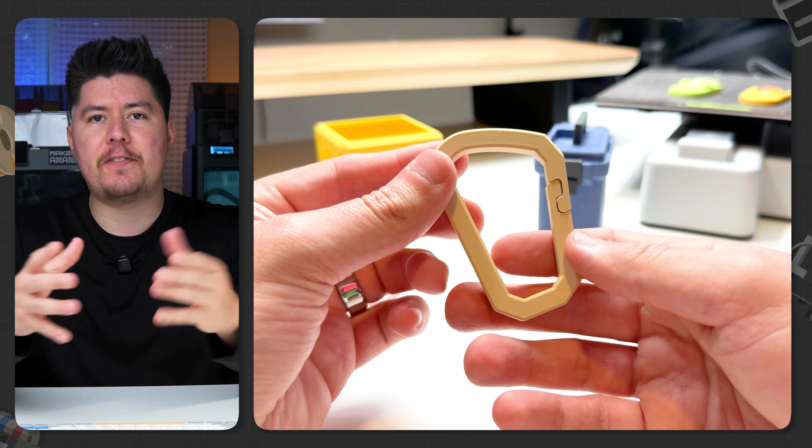Welcome to day 5 of learning how to design your own models for 3D printing, and in today's video, we're going to learn how to make this 3D printable carabiner from start to finish. This is a fun, functional design that anyone can design from scratch. It's perfect for beginners and it's a functional design.

Now, I do want to mention, since this is 3D printed and simply made from plastic, I would not recommend using this for outdoor use or for hiking. This is simply for educational purposes as well as for your own personal use. So with that said, let's go ahead and jump right into my computer and get started.

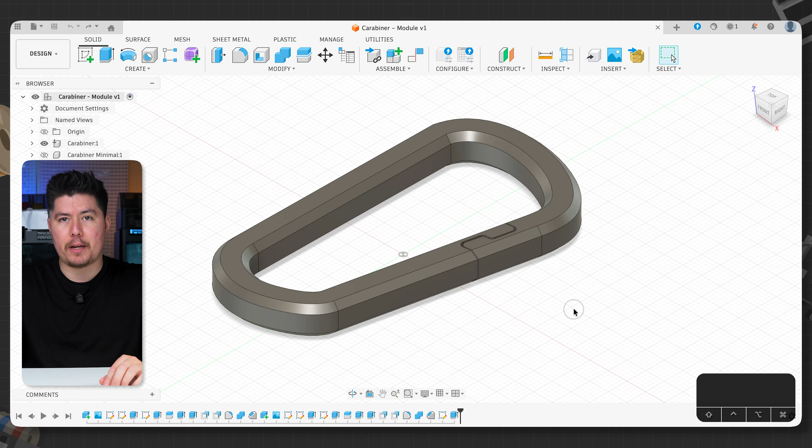So to start, the first thing we want to do here is open up a blank new canvas within Fusion. So I'll go ahead and create a new design within Fusion, select Part Design, then select Create New. Now, the first thing we need to do here is to create the overall sketch of our carabiner. Now, one thing to know is that this design isn't rectangular, nor is it circular like the previous designs we worked on. So we're actually going to import an image and then sketch out according to what that image looks like to create an accurate sketch of what our design is going to look like.

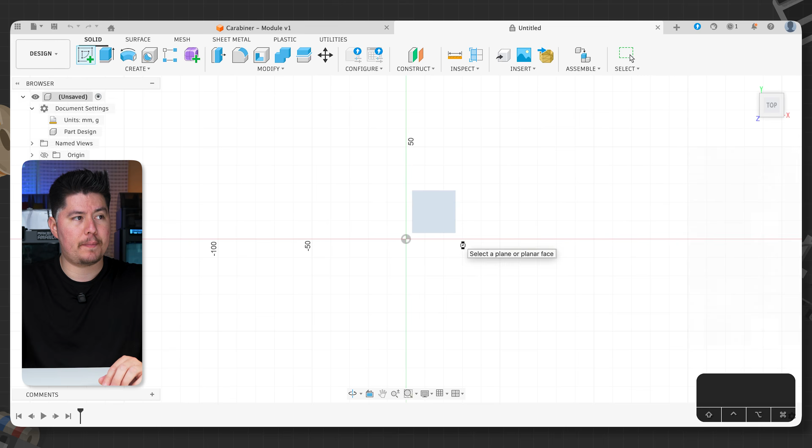So what I'm going to do here is create a rectangle. So the first thing I want to do here is click on Create Sketch, then select the bottom plane here. Clicking on Create, Rectangle, I'm gonna go ahead and select Center Rectangle. Now, from the origin, I'm gonna go ahead and draw out a rectangle. This is gonna be used as my reference to estimate the sizing for my image within my canvas.

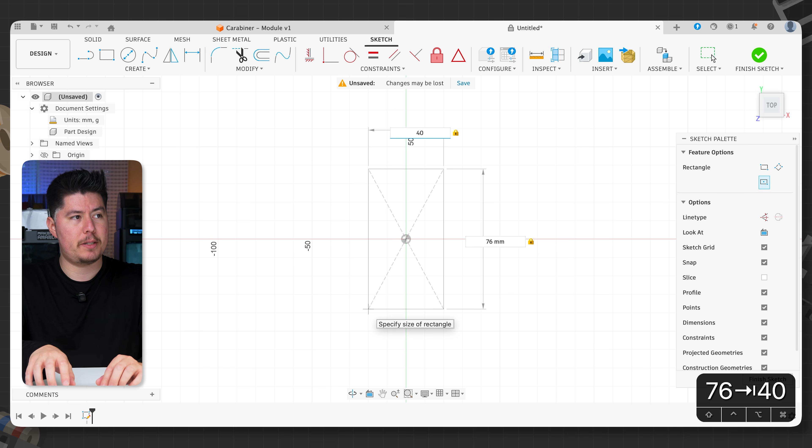So the way I'm gonna set this up is gonna be 76 millimeters for the height, and then the width is gonna be 40 millimeters. Once done, I'll press Enter. And now you should have something that looks like this. Now, we won't be using this in our design. We're just simply gonna be using this as a reference.

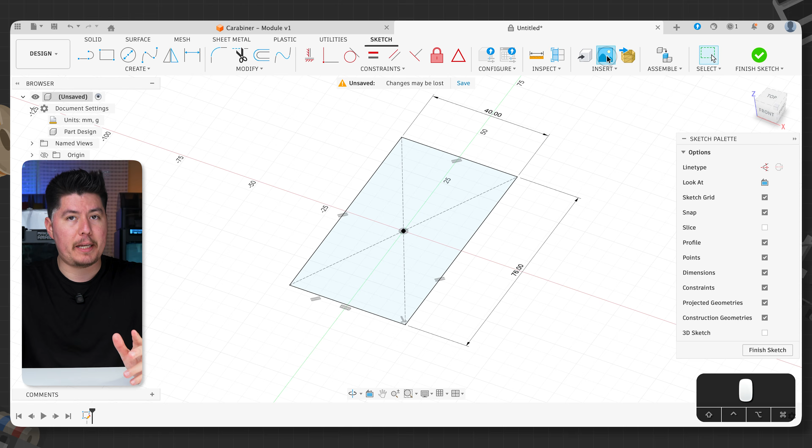So to start, let's go ahead and select the image icon here on the top right-hand side, selecting Canvas, then Insert from my computer. And then I'll go ahead and attach the image into my canvas here. Once done, Fusion 360 will prompt us with a dialog box as to where we want to place this. I'm gonna go ahead and select this profile here, and then it's gonna attach the image right in the center of our sketch.

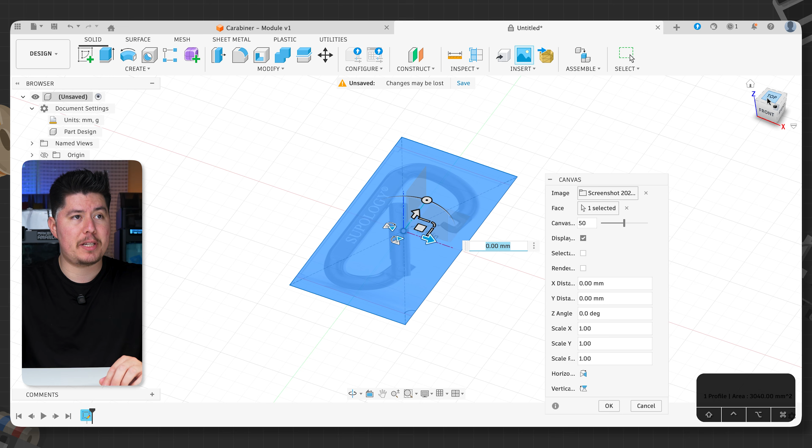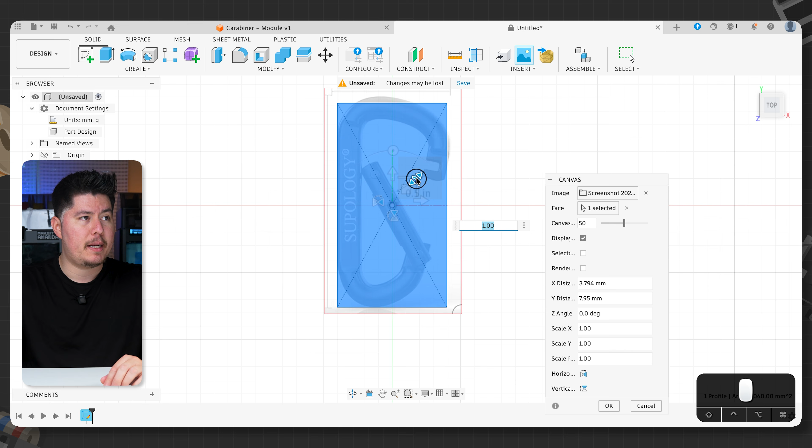From here, what I wanna do is to ensure that the overall image, or more specifically the carabiner in this image, lines up with the dimensions of this rectangle here. So I'm gonna use this square icon to pivot this, closest to the center at the bottom left-hand side, and then scale this up till all the ends around the carabiner touch the ends of this rectangle. So it doesn't have to be perfect. This is more so eyeballing it.

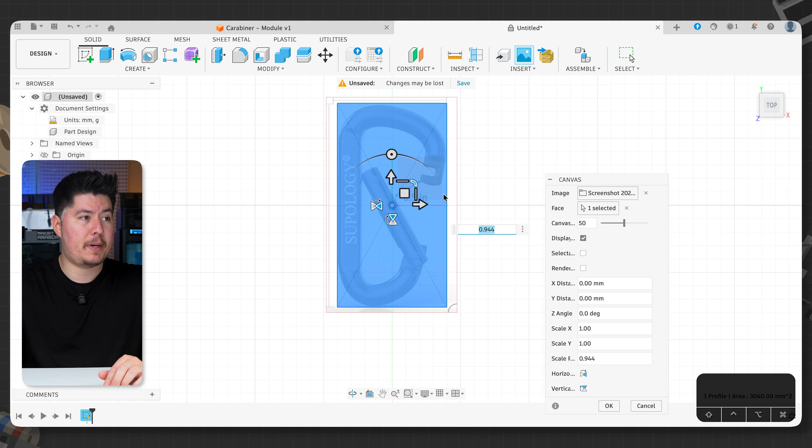And I'll make this a little bit smaller. Try to get as close as you can. Doesn't have to be perfect. Once done, I think this looks good for me. I have the outer edge here touching the rectangle, the top close to the very top, then the right, then the bottom. Once done, I'll press OK. And now we can go ahead and toggle off our original sketch by hovering over to the left-hand side, toggling on the folder icon, and turning off sketch 1, as we'll no longer need it.

Now we have a carabiner properly set to a sizing that will work for us within Fusion, which we'll export into our slicer, so we have a proper size for our carabiner. Keep in mind there are other ways to set the dimensions for this, but for now, simply as an exercise, we're just gonna import this into Fusion and then get started sketching from there.

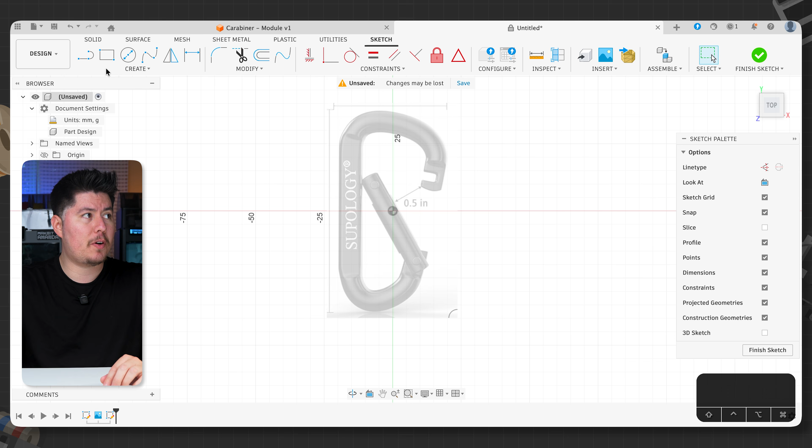To start, let's click on Create Sketch, then select the top plane here. Now what I wanna do here is to draw this out to the best of my ability. So I'm gonna use the line command within Fusion 360. I'm gonna hover over to the left-hand side, clicking on line, or pressing L on my keyboard.

Now I'm gonna go ahead and zoom in, selecting at this very edge of our carabiner, clicking our mouse, and let's go ahead and drag this up right till it reaches the very top. Once done, I'll select the checkbox here. And now as you can see, we can go in here and start mapping out a sketch for this product.

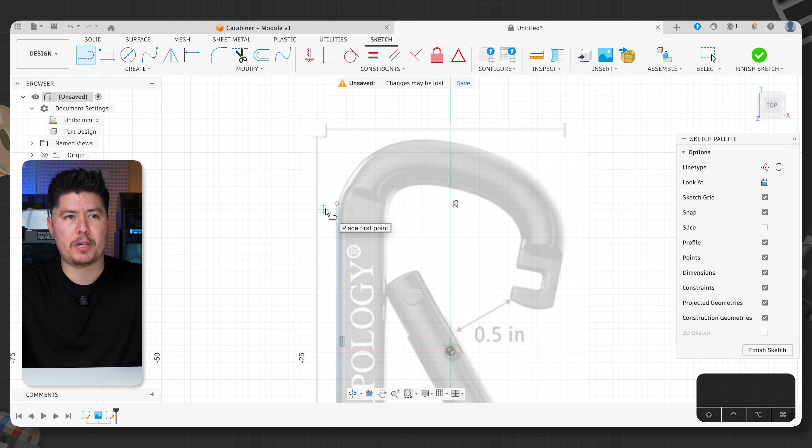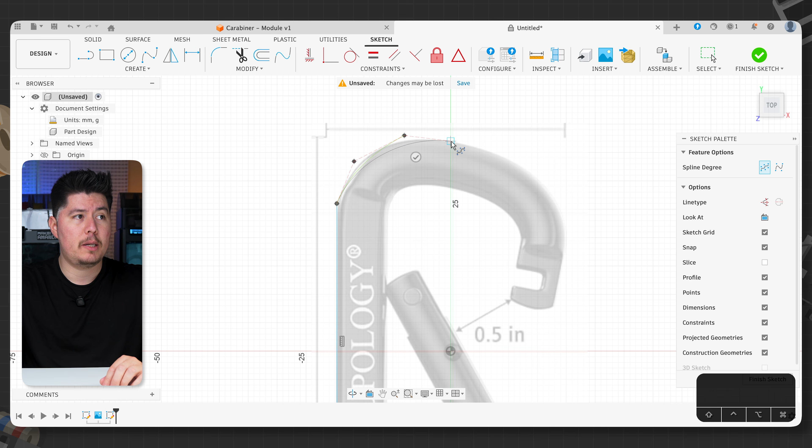But we can't use the line command for this because the line doesn't really give us an accurate representation of this kind of rounding corner here. Now, one feature we're gonna use is the spline point tool within Fusion. To find that tool, we're gonna press S on our keyboard, type in spline, and what we wanna use is control point spline. Now, selecting the last previously selected dot, we can go ahead and draw out a couple of more dots, rounding out the top and creating this sort of nice rounded top edge. And once done, I'll click the checkbox, press escape.

And since we're currently sketching, what we can actually do is to pivot these points right here in our sketch. And the cool thing about this feature is that we can actually pivot this and kind of move this around without actually affecting our design or the sketch too much. And I'm gonna go ahead and map this out as close as I can, getting a good look of our design and trying to map this as close as I can. And don't worry if it's not perfect. This is simply just for rounding out this corner.

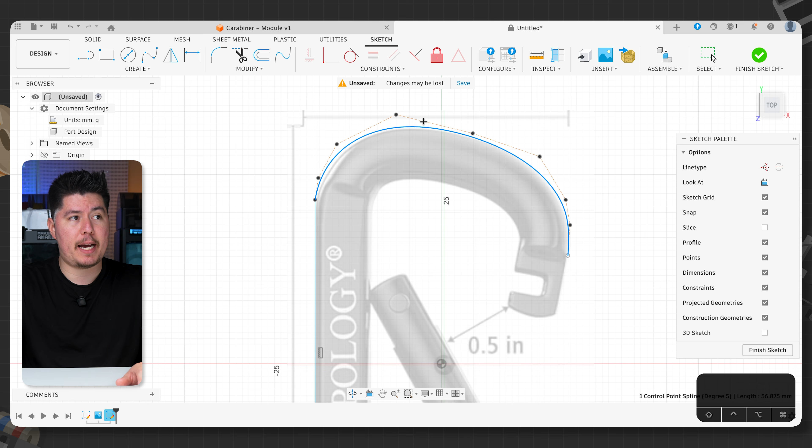And if by any chance you need to add another dot to this design, you can right click your line and you can insert control point, which allows you to select the line, add another dot, and that's going to increase the amount of splines that you just added, allowing you to further make this a bit more accurate to your image here.

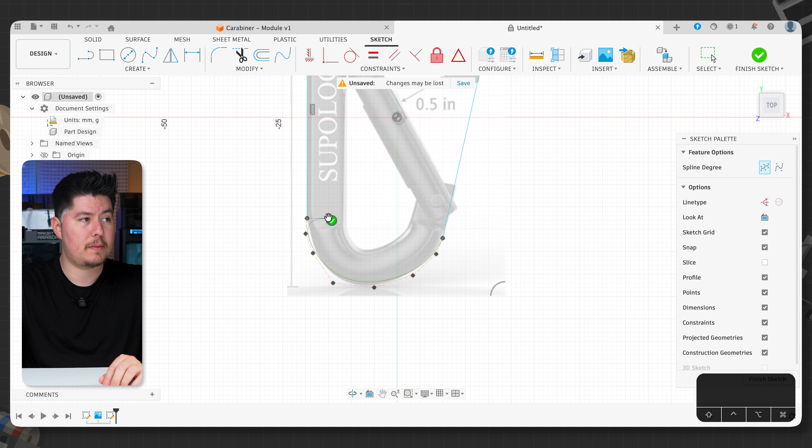Once done, let's go ahead and finish our sketch, pressing L on our keyboard, selecting this line here, or this dot, going all the way down. Then, right as it reaches the curve, checking this off, repeating once again, pressing S, control point spline. Then let's go ahead and finish this off by closing this out, and then just drawing it out and matching it up with our sketch or our image here on our canvas. Let's go ahead and clean this up. So dragging our points, making sure this lines up with our image. And I would say that looks good to me.

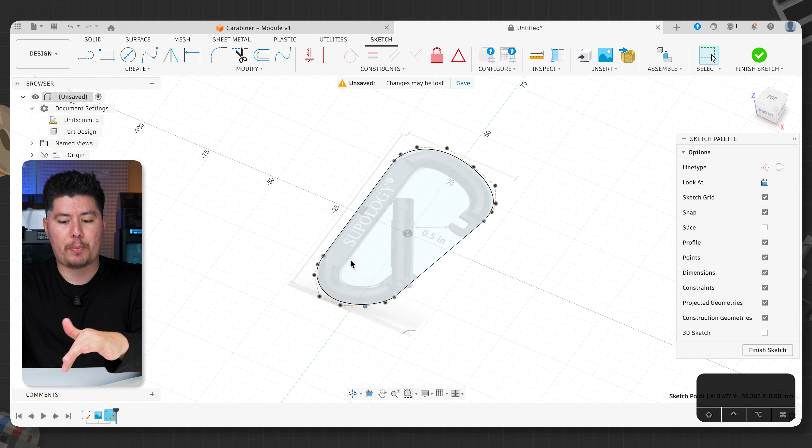Now, with all that completed, we pretty much have the overall layout for our design here. Now, one thing we can do is that we can go ahead and offset this in order to prevent ourselves from actually having to go back and redraw everything once again. So I'll press O on my keyboard, which is the offset tool, selecting the outer line here and dragging this line in to around, let's just say 7.5 millimeters. Once I'm happy with that, I'll press OK. And now we have a profile fully created within Fusion 360, specifically matching this carabiner we just designed.

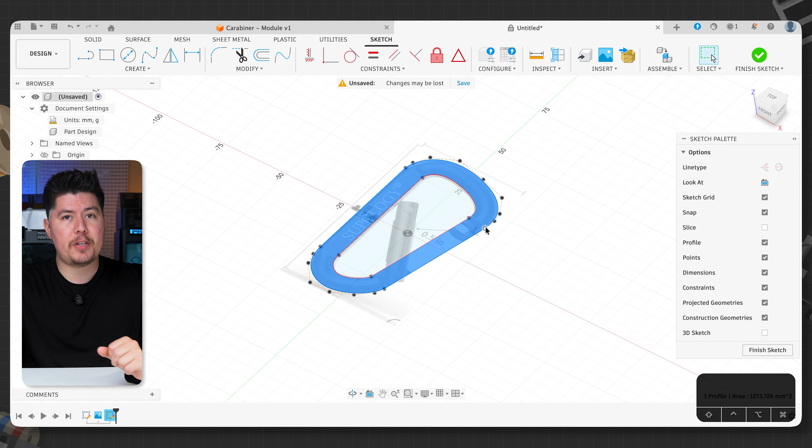Now with this profile fully mapped out, we can press E on our keyboard and extrude this by 7.5 millimeters, which is going to turn this into a solid body. Make sure the operation here is set to new body and the distance set to 7.5 and press OK. Now let's go ahead and turn off our canvas, more specifically the image, as we'll no longer need this. You can hover over to the left-hand side, click on your canvas icon here, turn that off, and that way we can see our body within Fusion.

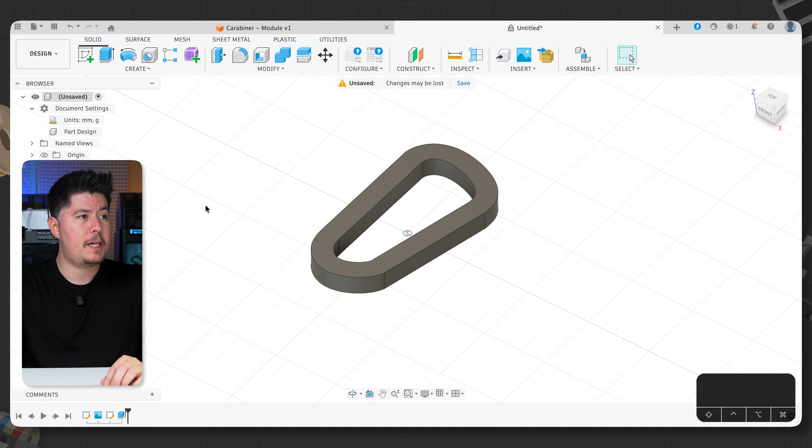Now, with all that done, the next thing we need to do here is to create a slit or an opening where these two top pieces here kind of connect, but there's just enough of a gap for them to kind of fold inward. So for example, traditional carabiners have a metal insert that allows you to push it in, allowing you to hook objects inside of it and keep them inside once it latches back together. But since this is 3D printed, we kind of have to get a little bit savvy around this, especially if we want to create a carabiner that replicates the exact style that we have with the traditional one.

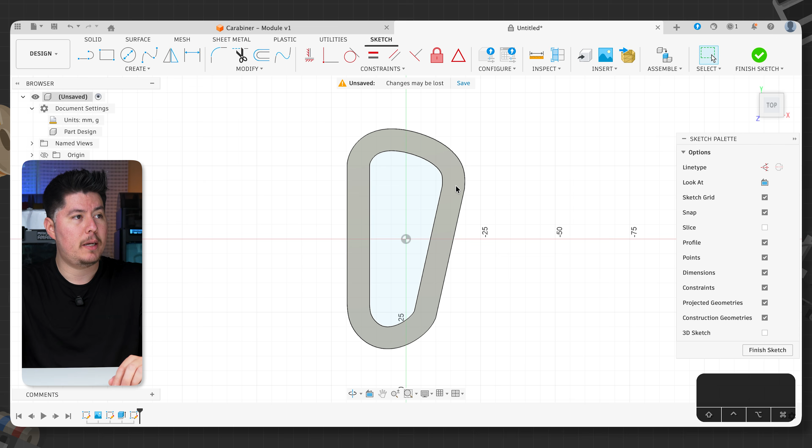So one thing I'm gonna do here is to create a sketch on this body here. So we'll hover over to create sketch here, then select the top face of our carabiner. Now, with that done, we're gonna go ahead and create a couple of lines. So just follow along with me here. I promise to do my very best to make this as easy as possible.

So to start, the first thing we want to do here is to press L on our keyboard. And what I want you to do is to create a total of 2 lines. Selecting this edge here, going all the way to the left. Once again, from this edge, going all the way to the left.

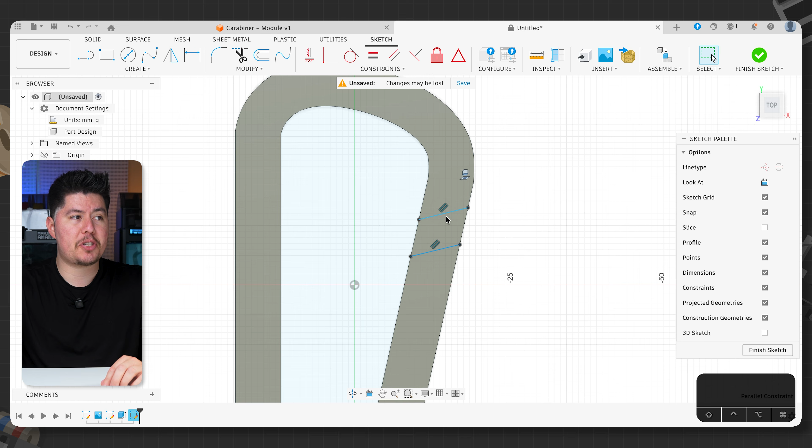Now, if by any chance your lines are not parallel, by default within Fusion, if you set your lines parallel to each other, you'll see this small icon here represented with these 2 lines. But in the rare instance where you did not set them parallel, you can use the parallel constraints feature within Fusion 360, located in the top middle section of the screen. Then select these 2 lines, and now they'll be fully parallel to each other. And since these were already parallel well in advance, you can see that error is going to pop up on the bottom right-hand side.

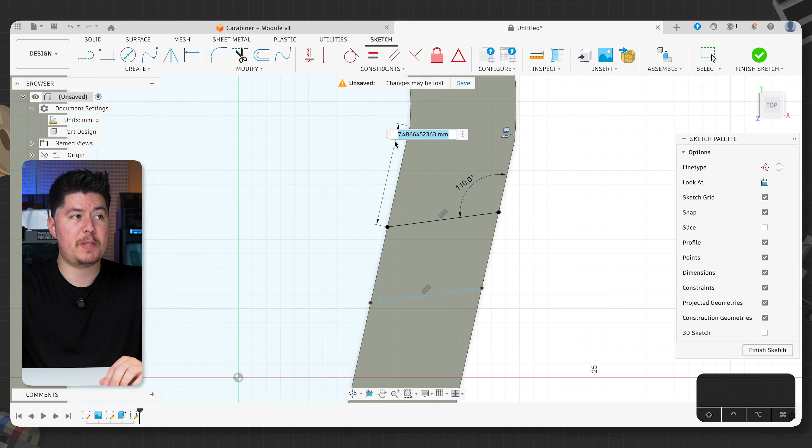With that said, the next thing we need to do here is set some dimensions for these lines, so that way we can create the profiles to cut into our body here. So pressing D on our keyboard, we'll select this line here, and then this line here at the top right-hand side. And now we're going to set the degrees for this. I'm going to set the degrees to 110 degrees. Now, one more thing we need to do is to select this dot here and line it up with the dot at the very top. I'm going to set the distance between these 2 dots to 3 millimeters.

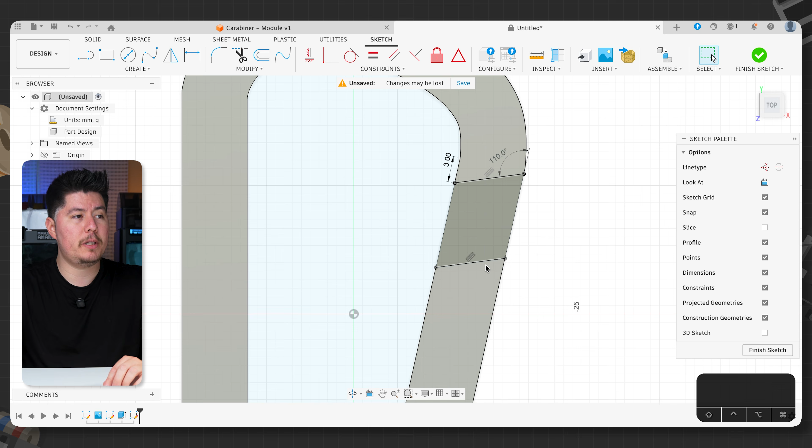Now, with that completed, you can see our top line is fully constrained, meaning that no matter what I do, I can't move this, I can't change its shape, I can't change its orientation. It's going to stay exactly as is, unless I delete one of these numeric values here. But the one at the bottom can freely move, and we need to fix that because we don't want this to freely move, especially if we're trying to create a piece that is essentially a slit to create the cutout for our design.

So let's go ahead and create a total of 3 more lines, which is going to create 2 profiles. So pressing L on our keyboard, we'll select at the very bottom left-hand side of this line, dragging this up, then to the right, and then completing it all the way at the top. Now, don't worry if it's not perfect. Right now, we're not meant to make it perfect just yet. We'll set some dimensions for this to clean this up.

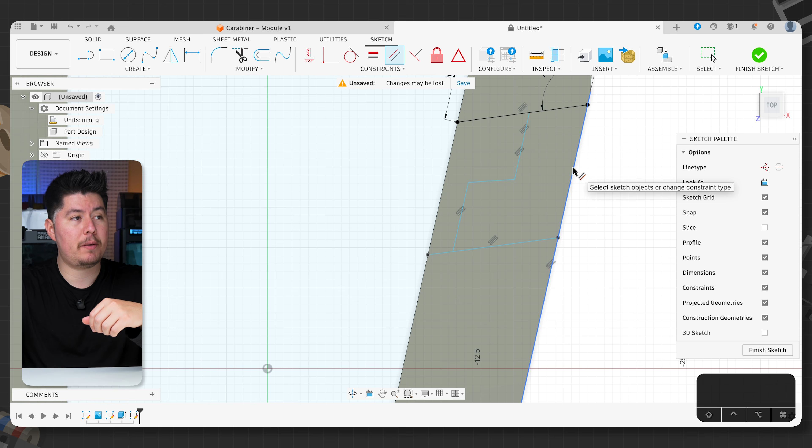So I'll select the parallel constraint feature on the top left-hand side, selecting this line here and this line here, making sure these lines are parallel, then repeating the exact same thing for the bottom left. The last thing we need to configure is the dimensions between this line at the very top and at the bottom, as well as this line in the center. To start, I'll press D on my keyboard, select this dot and this dot here, setting the dimension to, let's just say, 12 millimeters. Now, with that set to 12 millimeters, we can set up another dimension for the line in the center here. Selecting this line here, I'm going to set this to 6 millimeters.

Now, since this line is 6 millimeters, we'll also need to select the one at the bottom left, making sure that it matches up to the best of our ability and setting that to 6 millimeters as well. Now, with that done, let's set up another dimension to make sure that this thickness here also matches up with what we have here. These two lines here, setting dimensions to 2.25 millimeters and repeating the exact same thing for the bottom left. And there you have it. Now you have these two profiles created with these three lines.

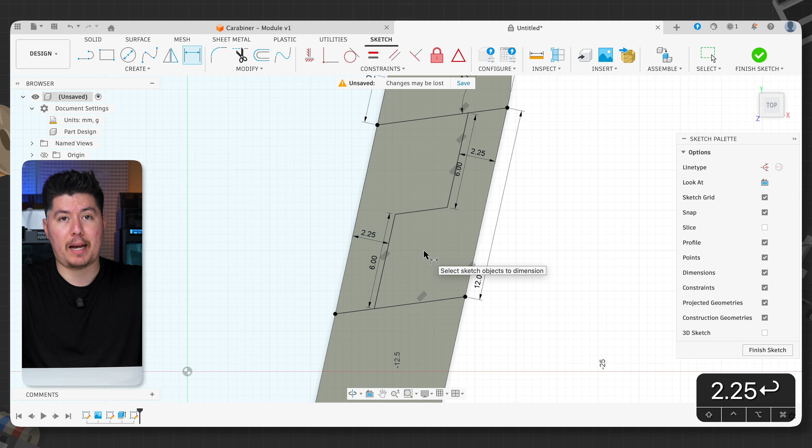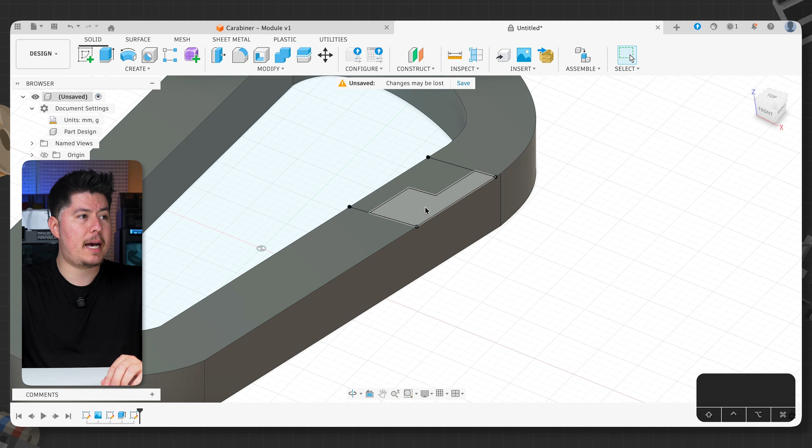I know it's a little complicated, but I did my very best to show you what it looks like. If you can, feel free to take a screenshot. Take your time to replicate everything we have here. A little confusing, but I promise once you get it down, it's super rewarding. So let's finish this off by clicking on Finish Sketch. And now what we want to do here is to create a cutout for our split. To do that, I'll click on these two profiles, press E, and I'll set the extent type to To Object, and I'll rotate and pivot this underneath our body here.

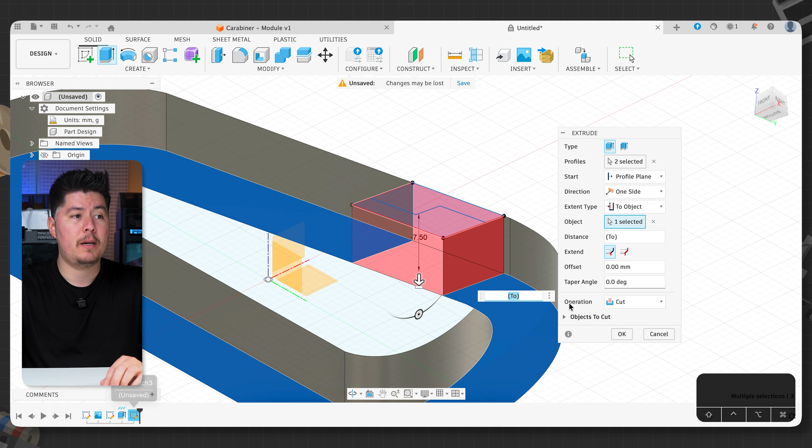What this basically allows me to do is that it's going to create a cutout from the top to the bottom. And if in any scenario I want to change the thickness or the size of this, this is going to continue to extrude this all the way down no matter what I do, especially when I go back in my timeline and make changes. So I'll go ahead and extrude this down to object, which is the bottom face here. Make sure the operation is set to cut and press OK.

Now let's go ahead and turn on our sketches, which is our sketch 3, which is what created our profile. And now what we need to do here is that we need to separate these two pieces here, because right now this is one whole body. So I'm gonna press S on my keyboard and look for this feature called split bodies. Pressing S on our keyboard, type in split. And as you can see here, there's an option here called split body.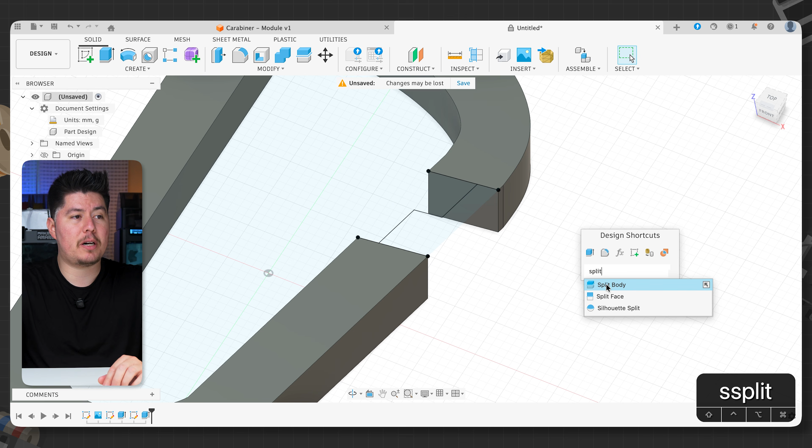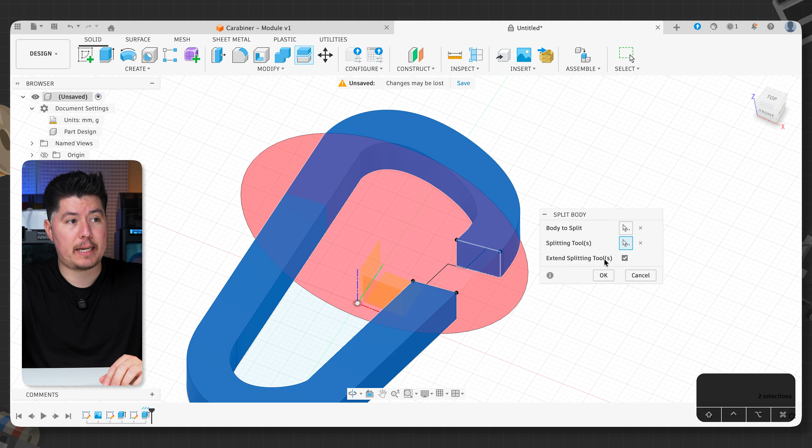I'll go ahead and select the body within our canvas, then select the splitting tool, which is gonna be this top line here, selecting this icon here, selecting this edge or that face. And as you can see, Fusion 360 has created a cutout for our product here. I'll go ahead and make sure that extend splitting tools is checked, press OK. And now as you can see, Fusion has created a cut into our body, which has separated the top piece and the bottom. Now, right now you can't really visually see it.

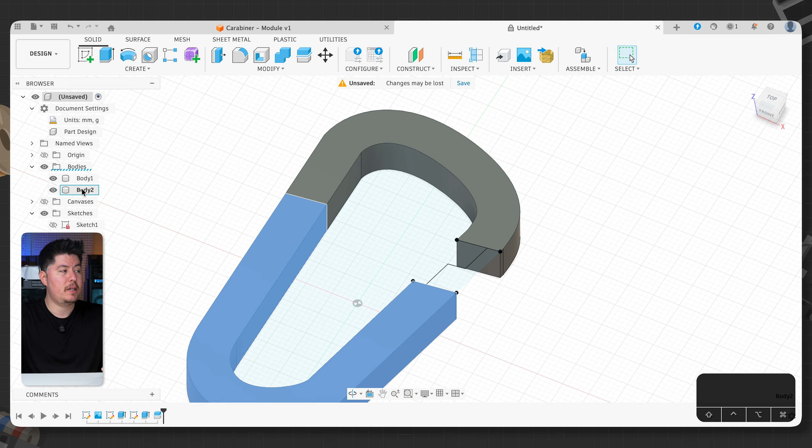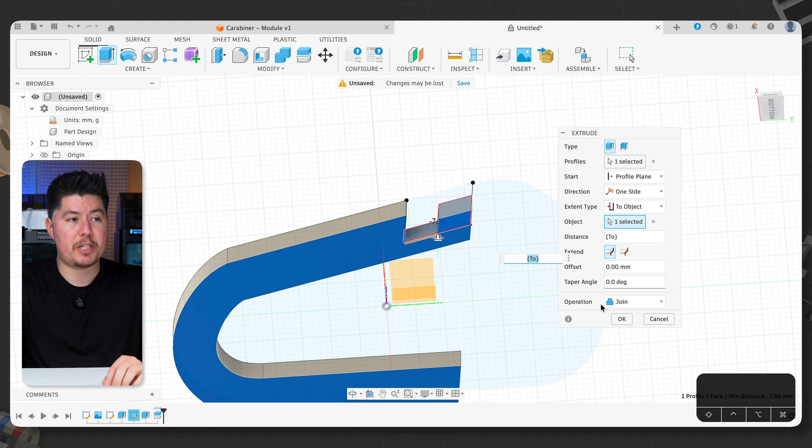In order to visually see it, let's go ahead and turn on our bodies here within our folder icon. And as you can see, we have two new bodies, which is the top and then the bottom. So let's go ahead and finish this up. Let's turn off the top, leaving our body turned on, and then we'll select this bottom profile here. Next, let's extrude this all the way down, pressing E, setting the extent type to to object, then selecting the bottom face here, making sure the operation is set to join and press OK.

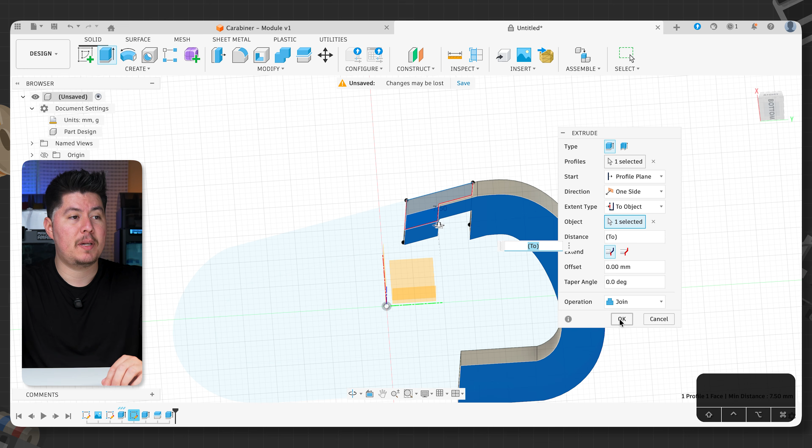Now we'll go ahead and repeat the exact same thing for the top. So we'll turn off body 2, turn on body 1, select this profile here, pressing E, and setting the extent type to to object, selecting the bottom face, making sure the operation is set to join, and press OK. Now, let's go ahead and turn off Sketch 3 as we'll no longer need it.

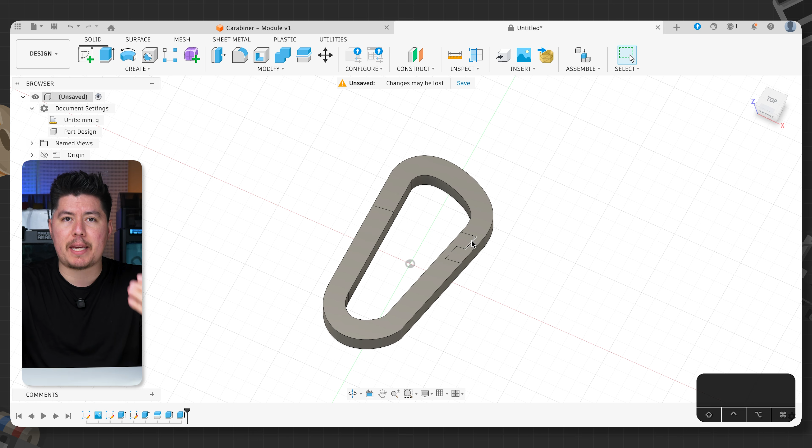As of right now, if we turn on both of these bodies, you can see that we have the overall workings of our carabiner, but right now they are currently two separate pieces and we need to combine them. But before we combine them, we need to create some sort of slit or opening or gap so that way they don't accidentally adhere to each other when we're printing it. So to do that, I'll go ahead and turn off body 1 once again. Then I'm gonna pivot this around.

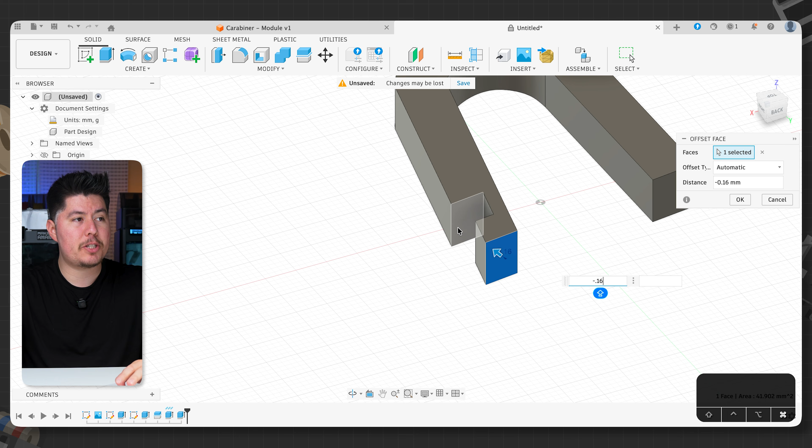I'm gonna right click on one of the faces and click on press pull. Now I'm gonna type in -0.16 and that's gonna create the clearance for the face here. So I'm gonna hold Command on my keyboard and select additional faces within our body here to add this to this feature. Now, once we have all the faces selected, if you hold Command, you can see what we previously had. Once you let it go, you can see it applied the press pull feature onto this face here, creating a little bit of a gap between our carabiner.

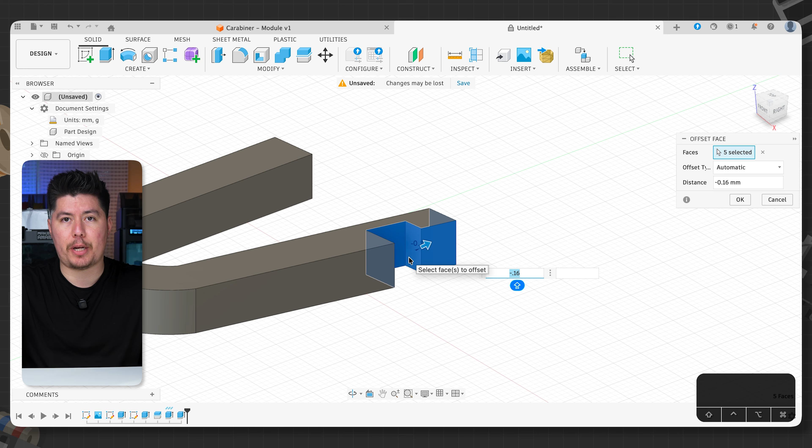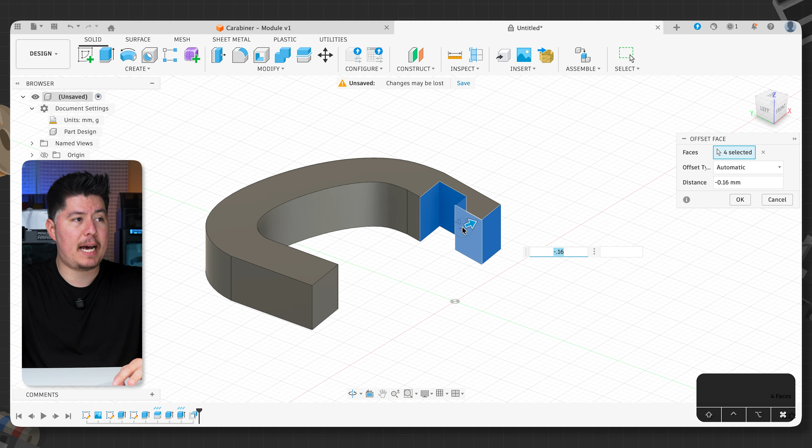So I'll go ahead and press OK, turn off body 2, turn on body 1, then let's repeat the exact same thing for the top. Right-clicking on the face, clicking press pull, typing in -0.16, holding Command, and we'll select additional faces to add this to our feature set. Once done, press OK. Now if we toggle on body 1 and body 2, we have this slit properly set up for our design, and we're pretty much almost done.

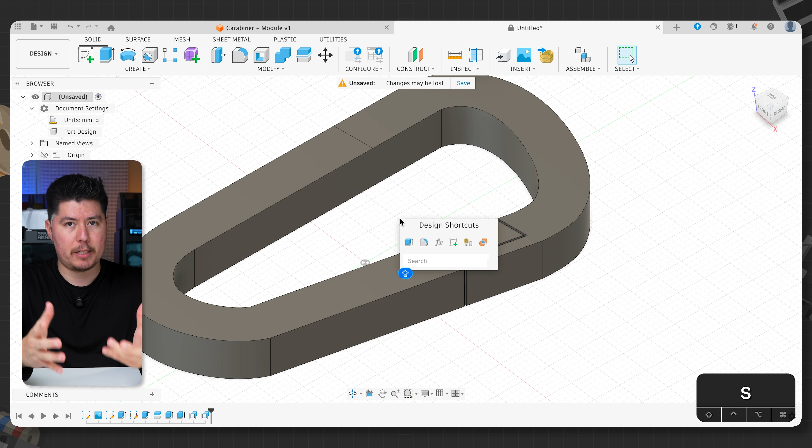Now let's go ahead and combine this. The best way to do this is to press S on your keyboard, which brings up the design shortcuts, and type in combine. Now there's two options. We're gonna use this second one, which is this blue looking icon here, selecting the top, then the bottom, making sure the operation is set to join, and press OK.

Now this is one whole piece once again. What we did was split the two parts in order to create this slit, then combine them together once we have the slit in place. Now, with that said, we're pretty much almost done. The last thing we need to do here is to round out these edges for our design, which I think is pretty optional, but I think it looks a little bit better.

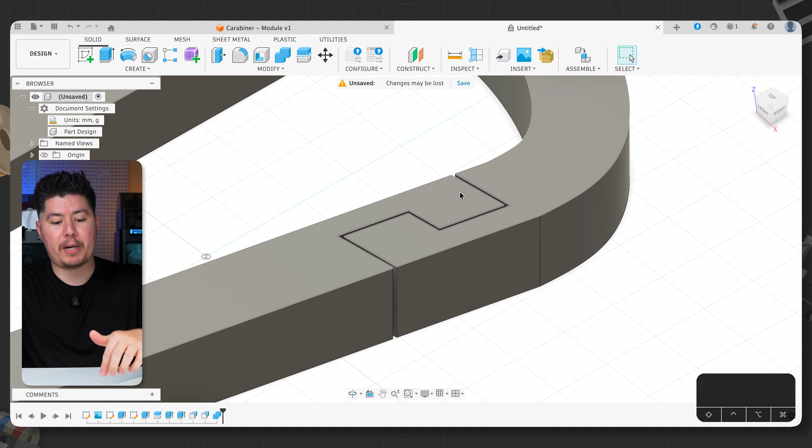So we're gonna press F on our keyboard, which brings up the fillet option within Fusion, then select all the edges for our design. It can be a little bit tricky here, but I want you to take your time with this. What we're doing is selecting every single edge of our line here. If you need to, zoom in to get a better look, selecting this edge, and we can round this to, let's just say 2.5. 2.5 seems to be a little bit too much, so let's just say 1.5.

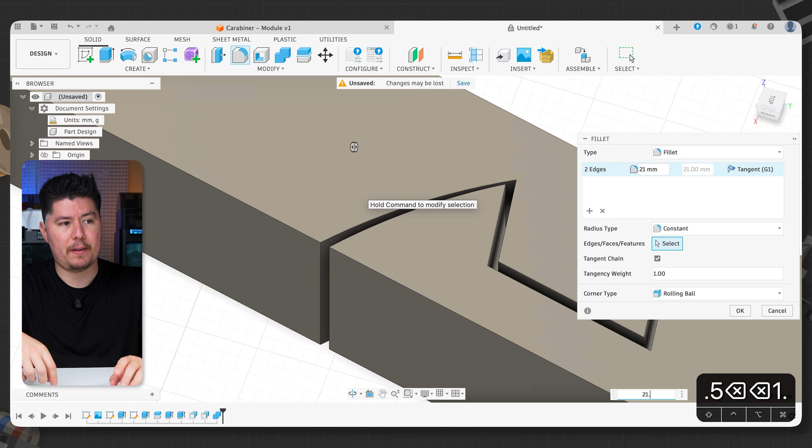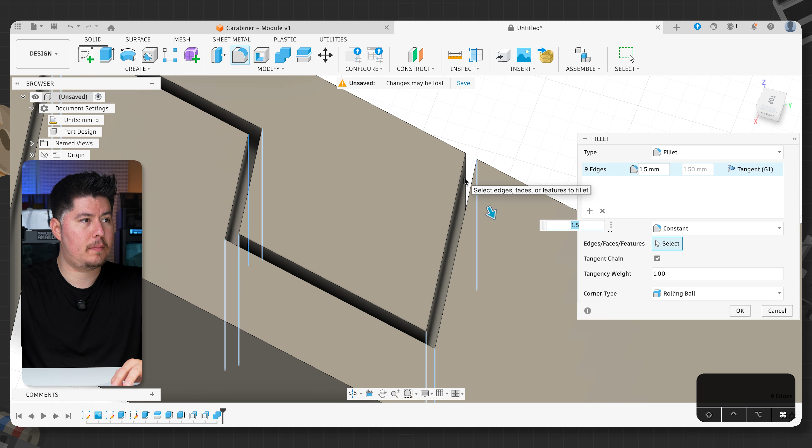So holding Command on our keyboard, let's go ahead and select these edges here, letting that go, and now we've successfully rounded these corners. Let's add another corner here, then one here on the right, and then one here at the very top. Once done, you can see we've successfully rounded out each corner here. I'll probably deselect this one at the top because it's probably not necessary. I think that looks good to me. With that done, press OK. And now we're pretty much done with our design.

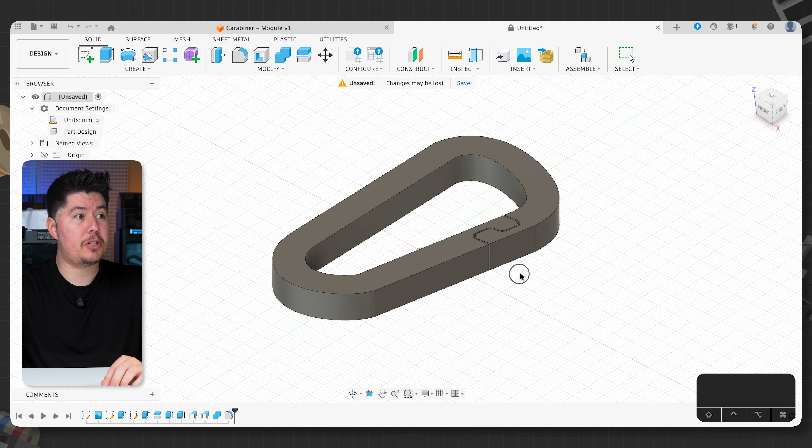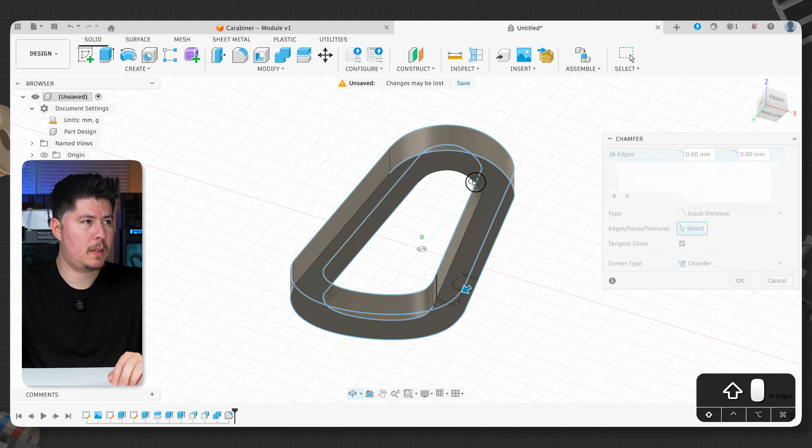The last thing we need to do here is to chamfer this top edge. Pressing S, type in chamfer. Let's go ahead and chamfer the top by selecting the top edges. Just make sure to take your time as we're selecting every single edge here. Once you have all the edges selected, let's chamfer this to around 1 millimeter. That's gonna add a small chamfer to our carabiner, adding this sort of effect.

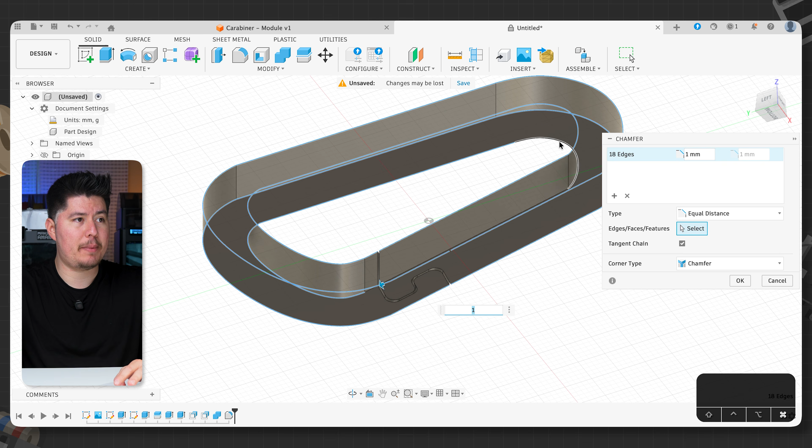If by any chance you accidentally forgot to add an edge, you can hold Command on your keyboard and make sure to select every single thing, so that way you can add it to your design. I'm gonna double check and make sure I have it all around my product, and I'd say that looks pretty good. So I'll press OK, and now we're pretty much done. That creates our fully 3D printable carabiner.

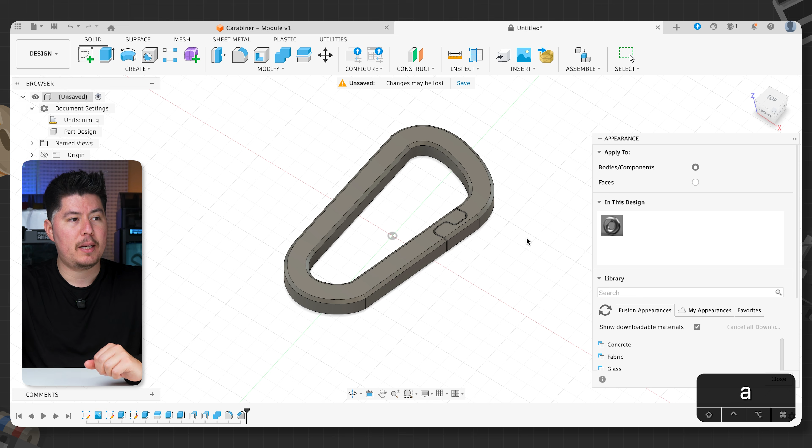The last thing I'm gonna do here is add some color to this. I'll press A on my keyboard and type in the color red in the library section here. Let's drag this up and search for the color red, so I can see show downloadable materials. I'll toggle that off and find a red color. I'm gonna use plastic matte red, drag and drop, close, and let's save this into Fusion. Clicking on save, name this day 5 carabiner. Once done, click on save.

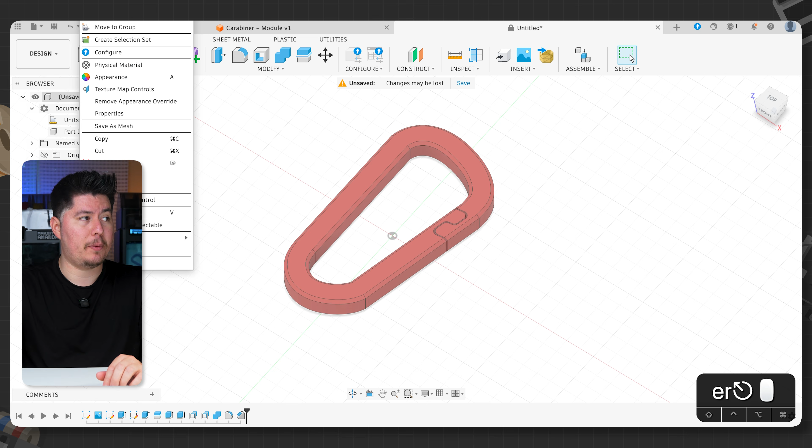Now let's export this into our slicer. I'll right click on body 1, click on Save as Mesh, and export this to your slicer. That's gonna open up Bambu Studio for me. Let's see how it pops up. And there you have it. You have your fully 3D printable carabiner, designed from start to finish. This is a fun and simple design, a little bit tedious to make in the beginning, but once you know how to make it, the next time around it's easier, and you can print a whole bunch of these for your own personal use, on your backpack or keychains or however you want to use them.